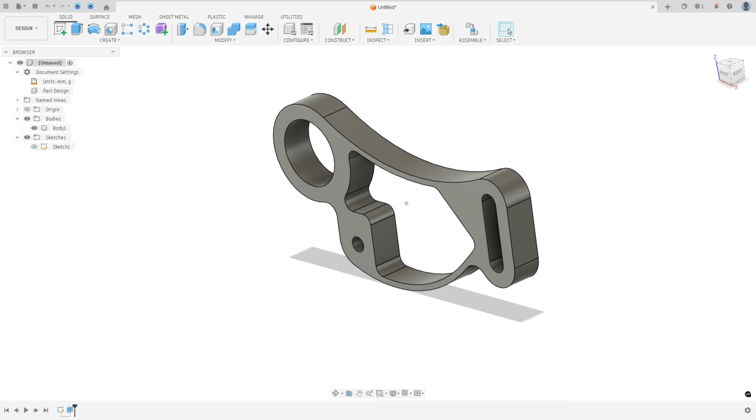Let's try one more challenge in Autodesk Fusion. In this challenge, we need to create this body using only one sketch.

So open Fusion and let's go. Let's make this challenge step by step.

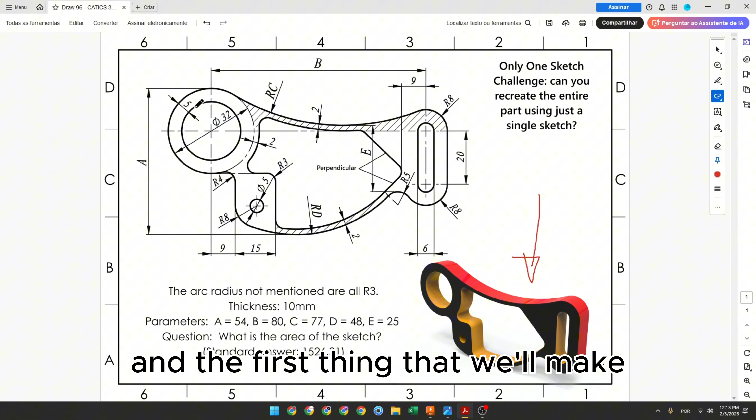The first thing we'll make is this circle here with 32 millimeters of diameter, and create this circle concentric with this one, with the distance between the two circles being 5 millimeters.

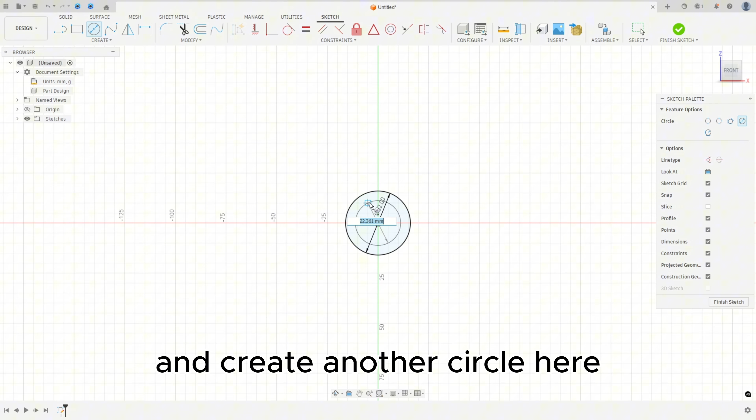Go to create a sketch, select the front plane, select the circle of 32 millimeters and create another circle here. Go to sketch dimension. The distance here is 5 millimeters.

Now we will create this slot. This slot is 20 by 6 millimeters, and the distance between this point here and this point here is letter B, 80 millimeters. And this point here is vertical with this point.

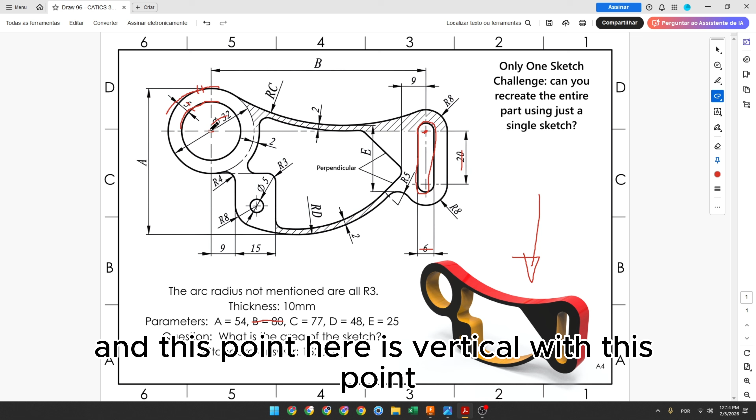Go to create, select slot, center to center slot, click here on this point, 20 millimeters here, and 6 millimeters of diameter.

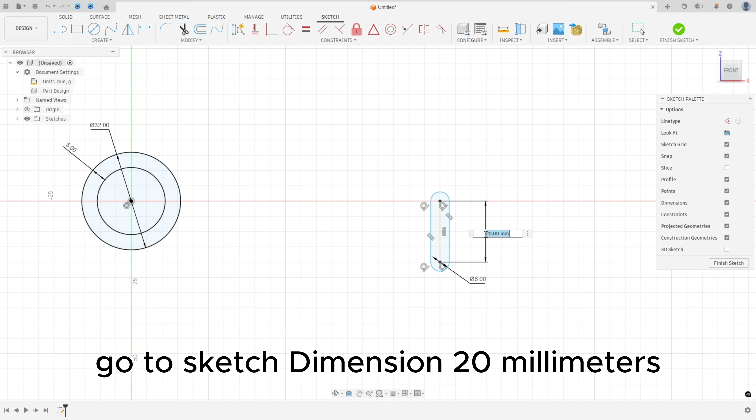Go to sketch dimension, 20 millimeters, and go to constraint, select horizontal vertical, select this point and this point here. And the distance between these two points is letter B, 80 millimeters.

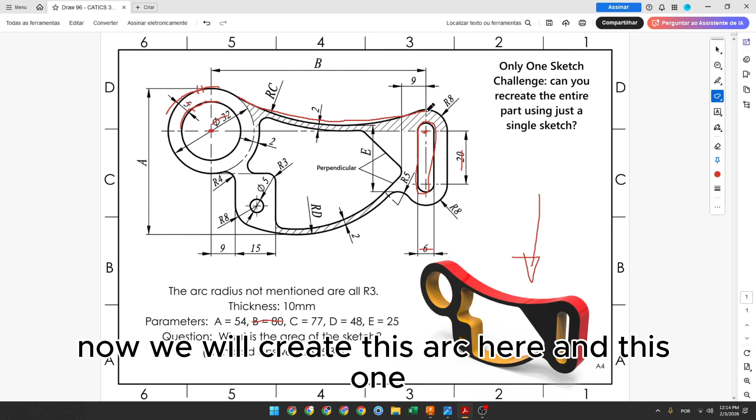Now we will create this arc here and this one. This arc has 77 millimeters of radius, and it is tangent with this circle and tangent with this arc.

And this arc here has 8 millimeters of radius, and it is concentric with this arc here.

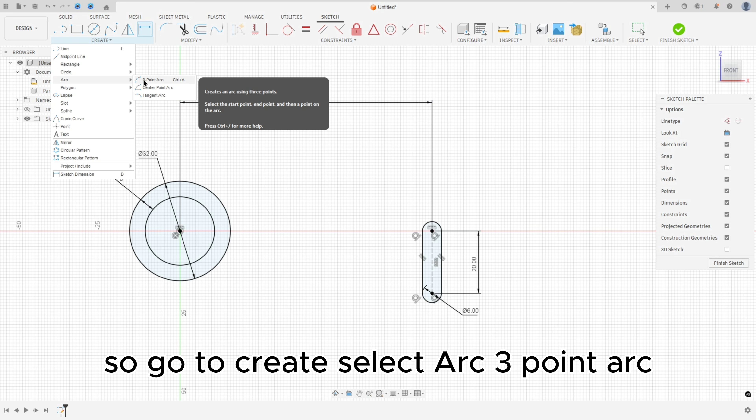So go to create, select the arc, 3-point arc, click here in the circle, make an arc here, and create another arc here. Make this arc tangent, and make this one tangent with this circle.

Go to constraint, select concentric, select this arc and this one. And select horizontal vertical, select this point and this point here.

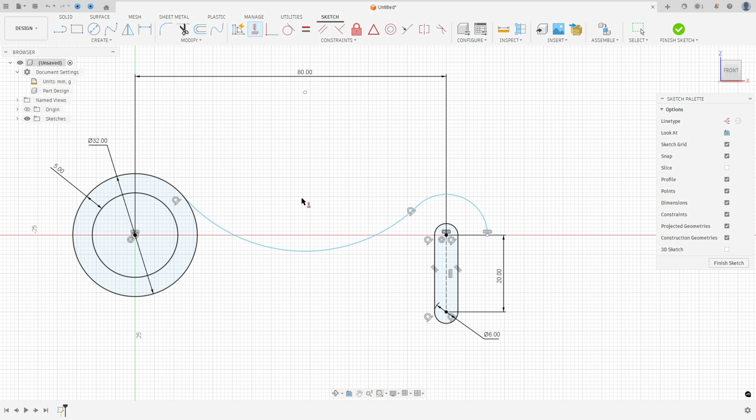Go to sketch dimension. The radius here is 77, and the radius here is 8 millimeters. Let me move this dimension a little bit.

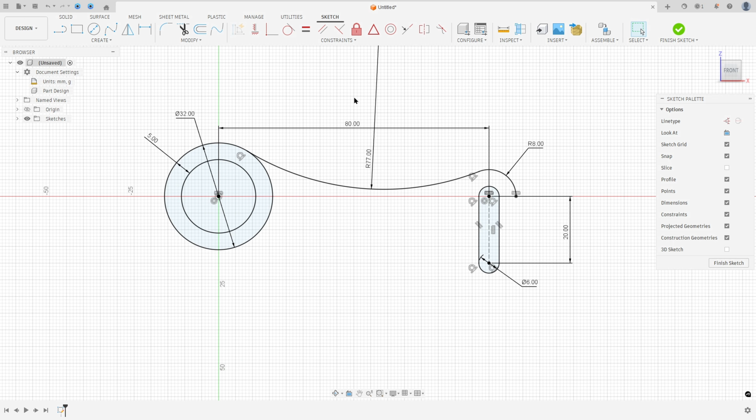Now we will create a line here with 20 millimeters and create another arc here with 8 millimeters of radius.

So select line, click here in this point, make a line here. Click here and hold the left button of the mouse to create another arc.

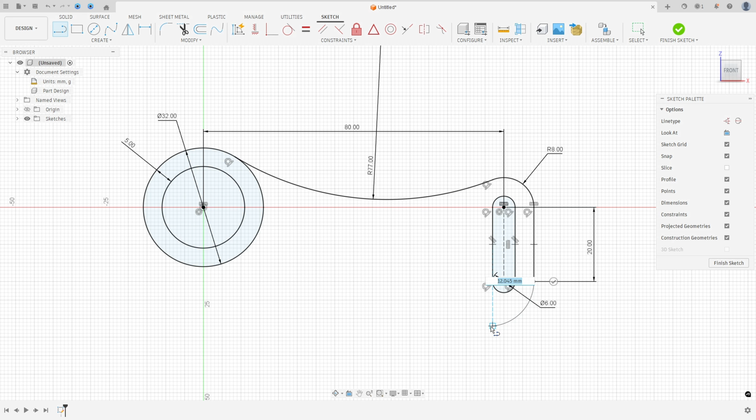Go to constraint, select horizontal vertical, select this point and this point here. And the radius here is 8 millimeters.

Or you can just make this concentric here. Move this point here a little bit.

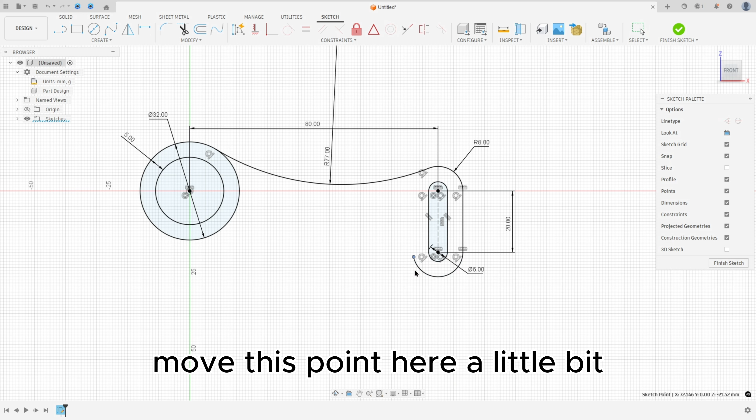And here we have an arc with 5 millimeters of radius. So go to arc, 3-point arc, make an arc here, and make this tangent with this arc here. And the radius here is 5 millimeters.

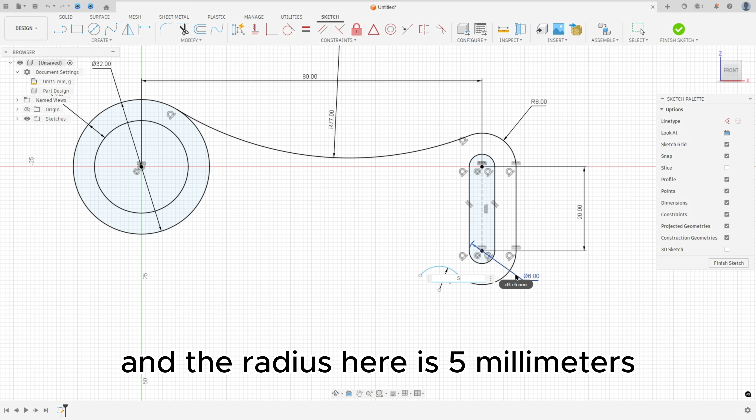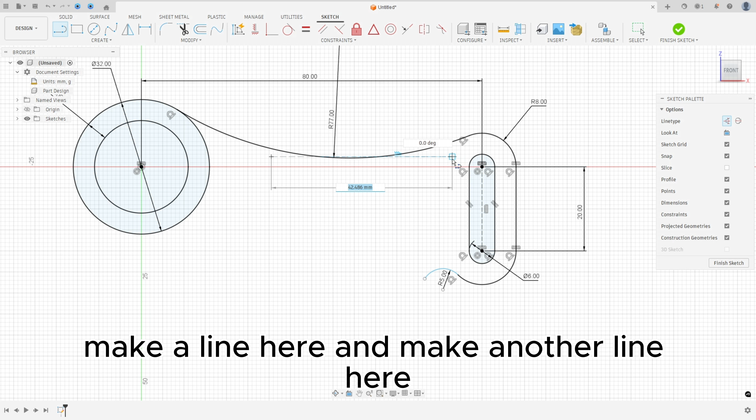So to create this, select line, construction line, make a line here, and make another line here. Go to constraint, select tangent, select this line and this arc, select this line and this arc.

And the distance between these two lines is 25 millimeters.

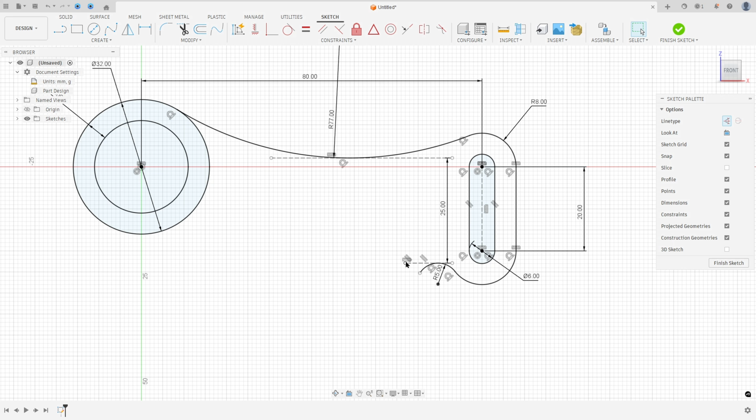You can move this line a little bit here, or move this dimension. I made 2 lines here, sorry. I will move this just to make the sketch better to see, okay?

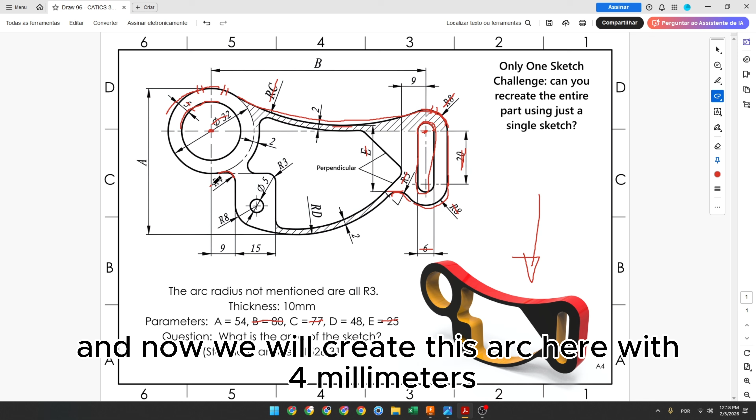And now we will create this arc here with 4 millimeters, and this arc is tangent with this circle, and we will create this line here. The distance between this line and the center point is 9 millimeters.

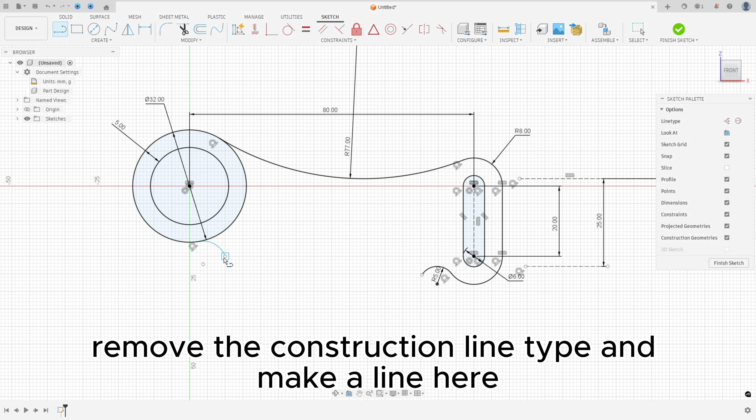So go to arc, 3-point arc, click here in the circle, make an arc here, remove the construction line type, and make a line here. Make sure that this arc is tangent with this line and tangent with this circle.

Go to sketch dimension. The radius here is 4, and the distance between this line and the midpoint here is 9 millimeters.

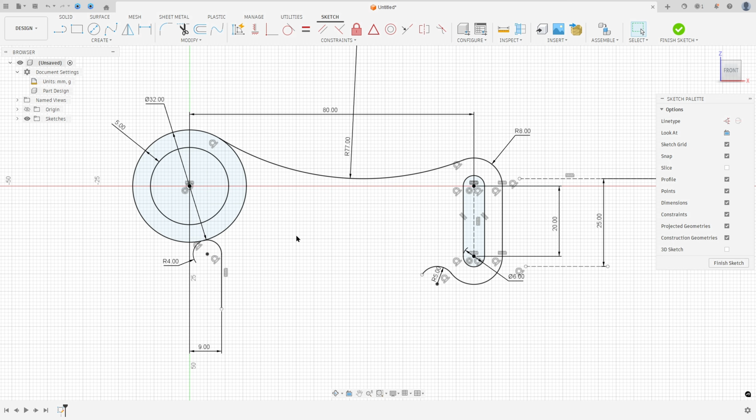And now we will create this arc with 8 millimeters of radius, and this arc here with 48 millimeters of radius. So go to create, select the arc, 3-point arc, make an arc here, and create another arc here.

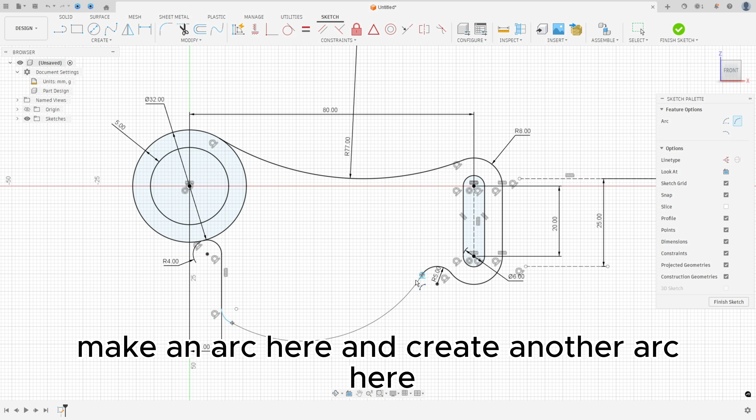This arc is tangent on both sides. Let's delete this a little bit. Make this tangent here.

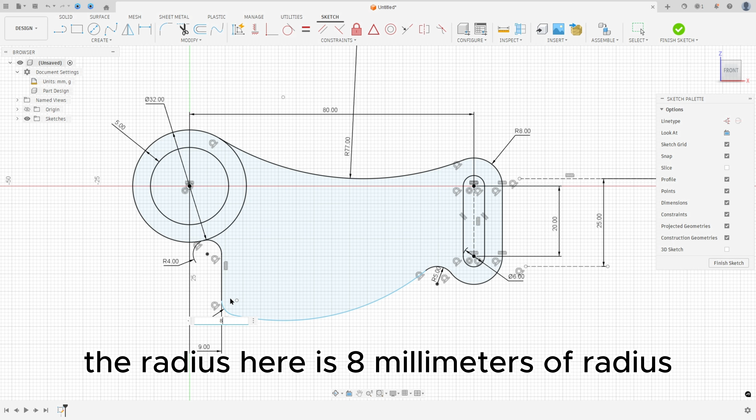Go to sketch dimension. The radius here is 8 millimeters, and the radius here is 48.

And the distance between the tangent point of this arc and this point here is letter A, 54 millimeters.

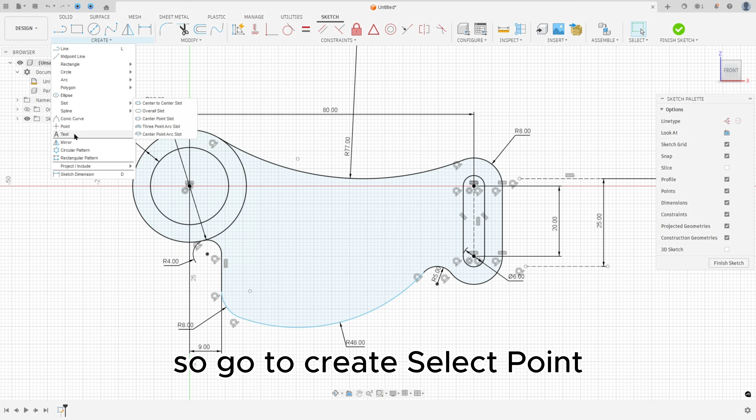So go to create, select the point, make a point here, and go to constraint, select horizontal, vertical, select this point and this point here. Then select line, construction line, make a construction line here, and make this construction line tangent with this arc.

Go to sketch dimension, select this line and this point here. The distance here is 54 millimeters.

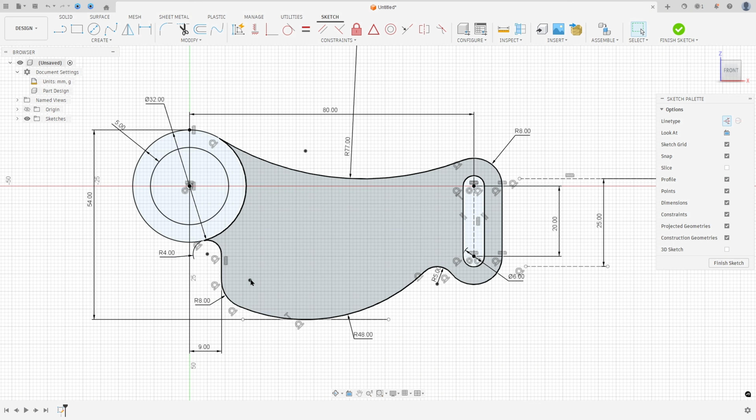We made this one. Now go to modify and select break. Select this arc here. And click here, make this construction line type.

And now we will create this arc. This arc is concentric with this circle. And the distance between this arc and this arc here is 2 millimeters.

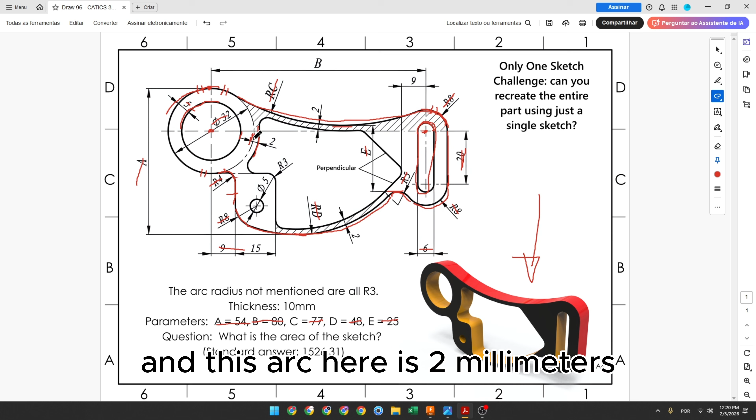So go to create, select the arc, center point arc, click here in this point. Remove the construction line type. Make an arc here. And go to sketch dimension. The distance here is 2 millimeters.

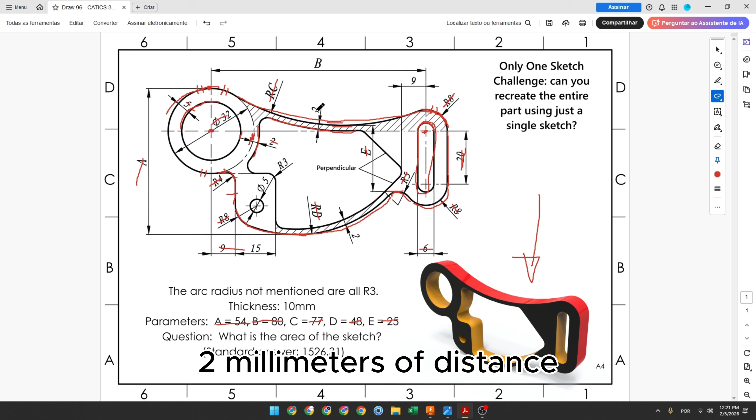And now we'll make an offset of this arc here, 2 millimeters of distance. So go to offset, select it, remove the chain selection here, select only this arc, move here 2 millimeters, press OK.

And go to constraint, select coincident, select this point and this point here.

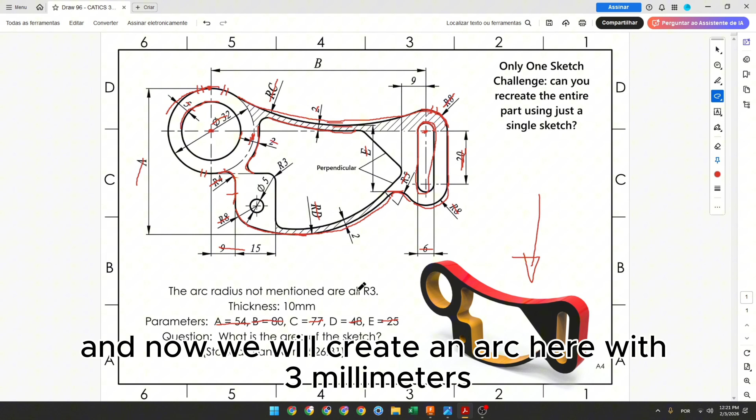Now we will create an arc here with 3 millimeters. All this fillet, or these arcs, and this edge is 3 millimeters, okay? So we will create an arc here and a line here.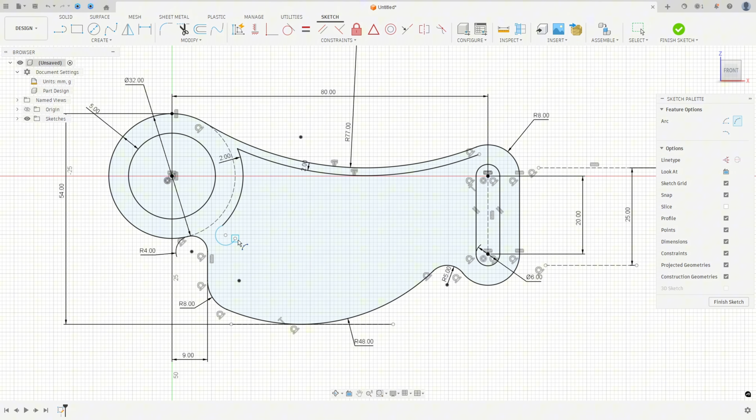Select the arc, 3-point arc, make an arc here. Move this a little bit and make a line here. Go to constraint, select tangent, select this arc and this one, this arc and this line. Go to constraint, select horizontal, vertical, select this point here.

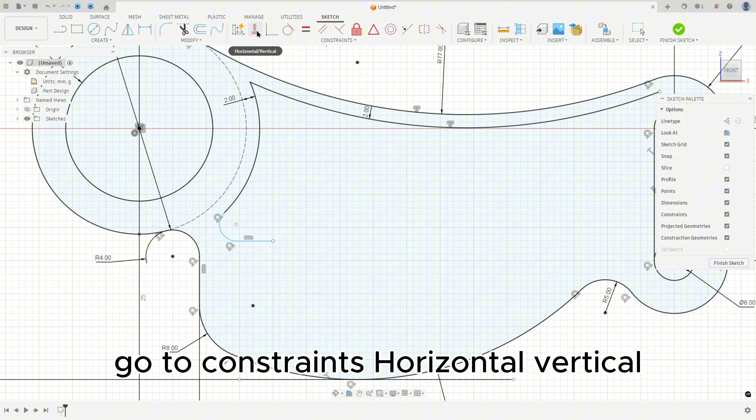Let's create a point here. Go to constraint, horizontal, vertical. Select horizontal, vertical again. Select this line here, select this point and this point here.

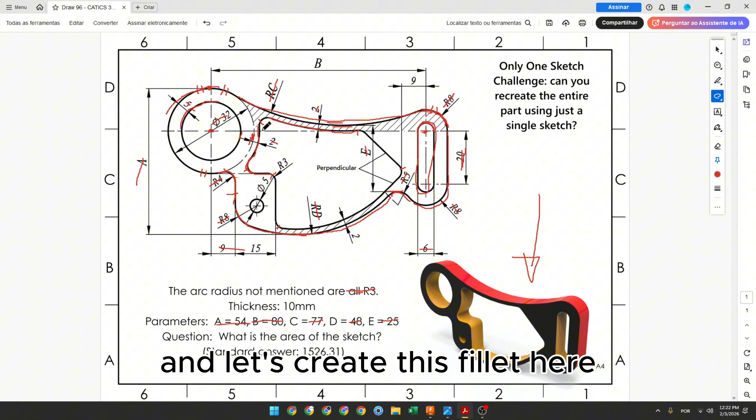Go to sketch dimension. The radius here is 3 millimeters. And let's create this fillet here, 3 millimeters.

Go to fillet, select this arc and this one, 3 millimeters, press OK. He lost the reference here, so go select this arc and this one. The distance here is 2 millimeters.

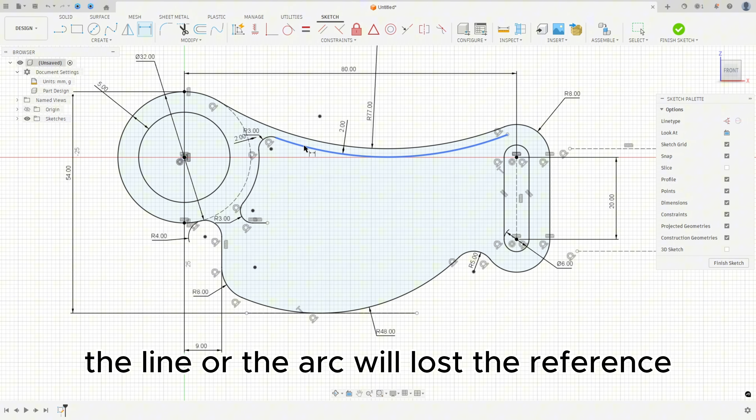Sometimes when you use a fillet, the line or the arc will lose the reference, so you need to make this again, okay? Now we will create this fillet here with 3 millimeters and this line, and the distance between this line here and the midpoint and this line here, sorry, is 15 millimeters.

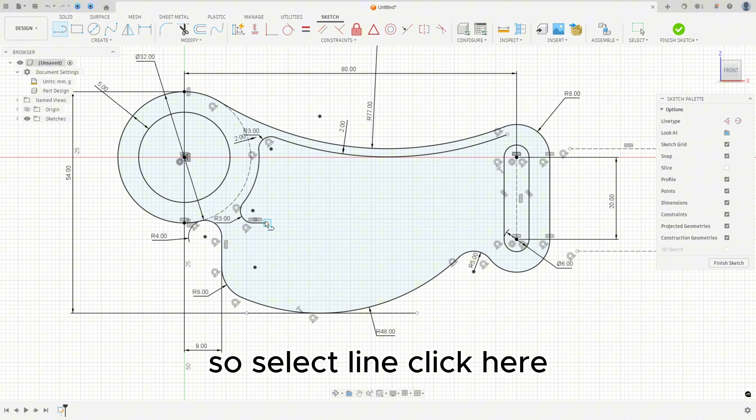Select a line, click here and hold the left button of the mouse to create an arc and make a line here. Make this tangent on both sides and make this line a vertical line. The radius here is 3 millimeters and the distance between this line here and this line here is 15 millimeters.

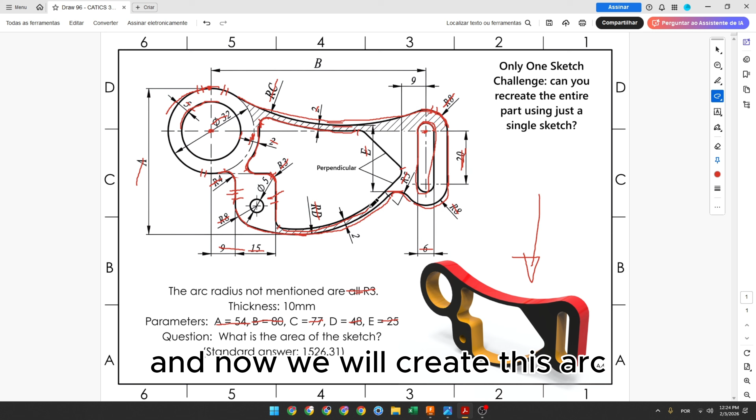Now we will create this arc, and the distance between this arc and this one is 2 millimeters, so we'll create an offset, and here we'll have a fillet with 3 millimeters. Go to offset, select this arc here, minus 2 millimeters, and press OK.

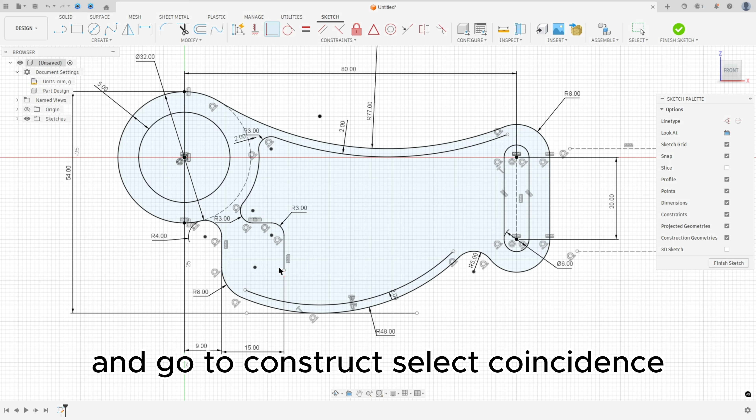Go to constraint, select coincident, select this point and this point here. Now go to fillet, select this arc and this one, the fillet here is 3 millimeters, press OK. Look that he lost the reference, so go to sketch dimension, the distance here, 2 millimeters.

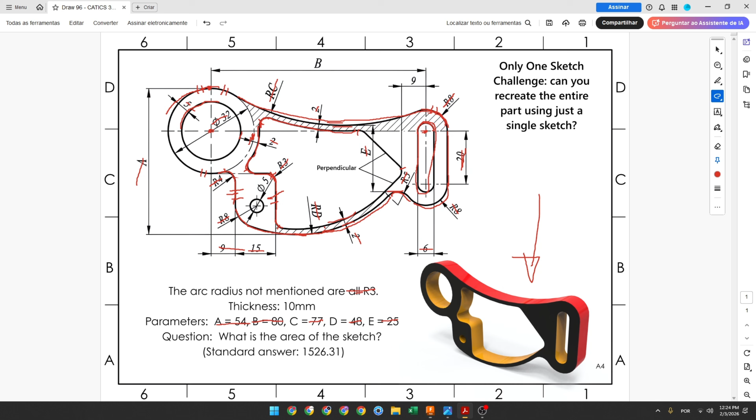Here let's create the circle. It is concentric with this arc and the diameter is 5 millimeters. Select the circle, click here on this point, 5 millimeters, and press OK.

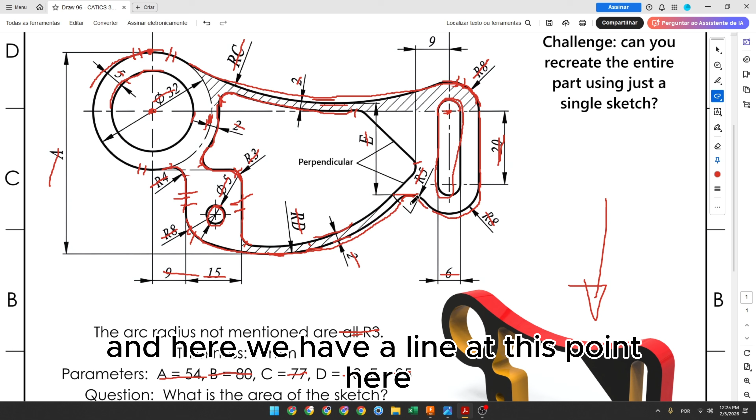And here we have a line at this point here. Let me remove some. We have a line here, this arc and this line. This line is tangent with this arc.

And here we have a fillet with 3 millimeters and another line here. This line and this one is perpendicular.

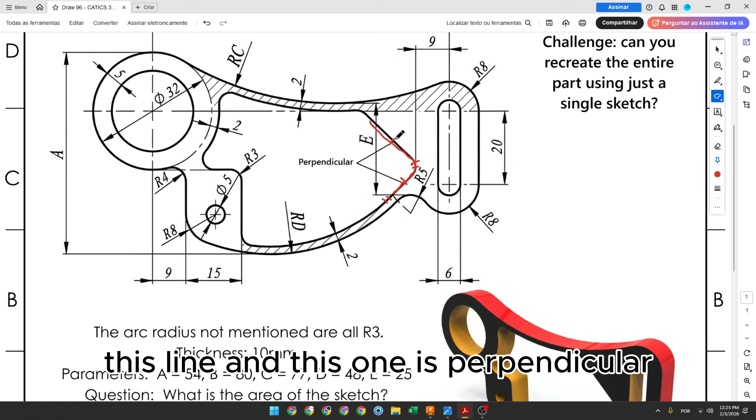Let's move this a little bit here, select the line, click here on this point, make a line here, make an arc, and make another line.

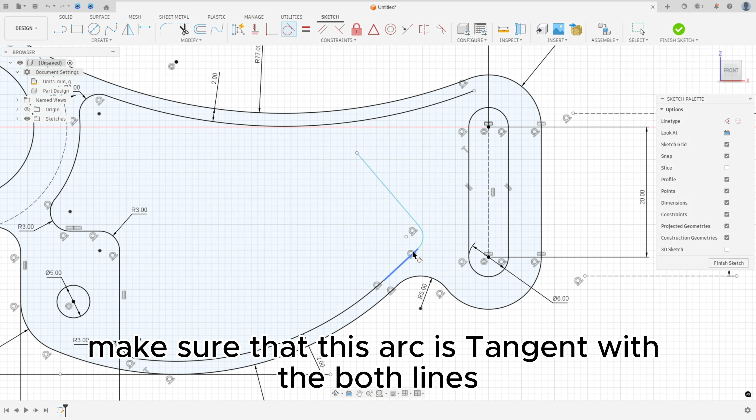Go to constraint, select tangent, select this arc and this line here, make sure that this arc is tangent with both lines, and make sure that this line here is tangent with this arc.

Select a line, a construction line type. We needed to create a line here. It is perpendicular with this line. And this point here is where this arc meets this arc here.

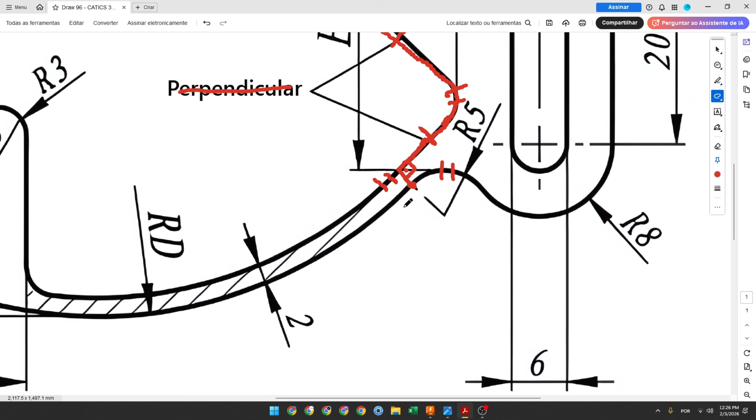Select a line, a construction line, click here in this point, make a line here. And here go to constraints and select perpendicular, select this line and this one.

Go to sketch dimension. This arc here has 3 millimeters. Go to constraints, perpendicular, select this line and this one. Now go to coincident, select this point here and this point here.

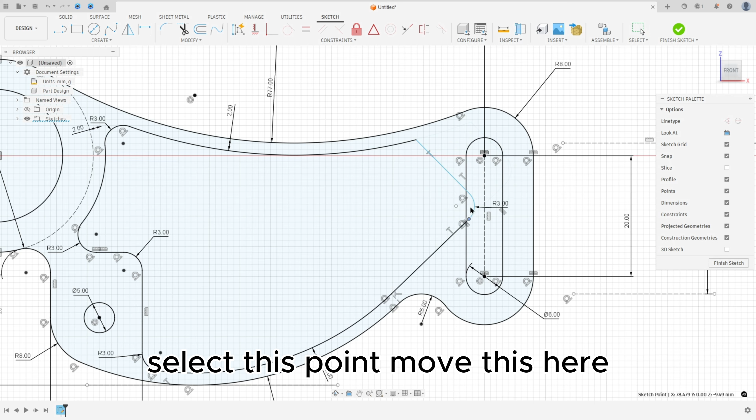And we can move this a little bit. Select this point, move this here. And the distance between this arc here, the tangent point of this arc and this line here, is 9 millimeters.

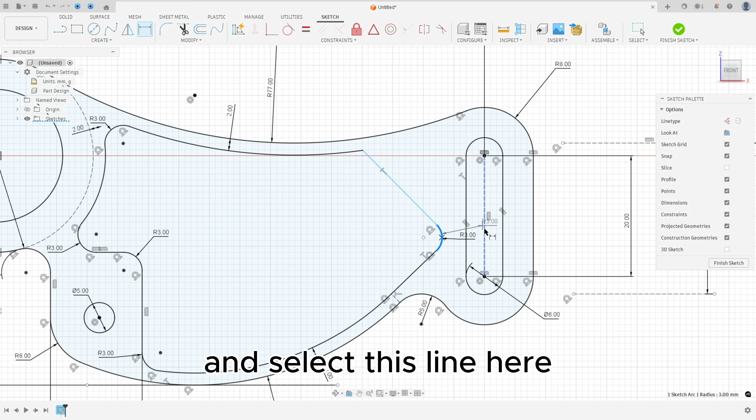Go to sketch dimension, click with the right button and select this arc here and select this line here. The distance is 9 millimeters. When you click with the right button, you need to select pick circle arc tangent to take the tangent point of this arc. Okay. And here we have a fillet with 3 millimeters.

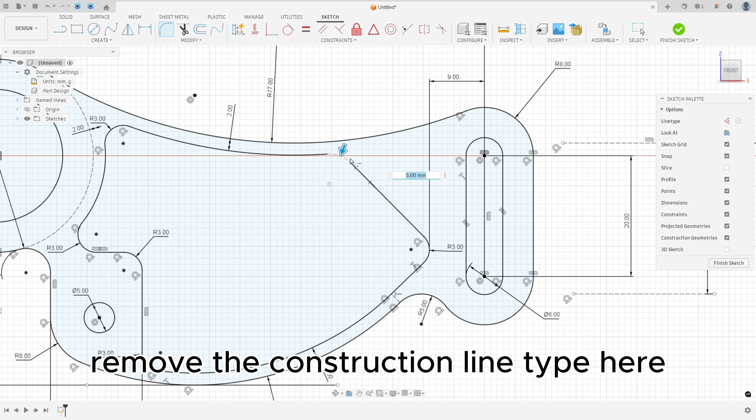Remove the construction line type here. 5 millimeters.

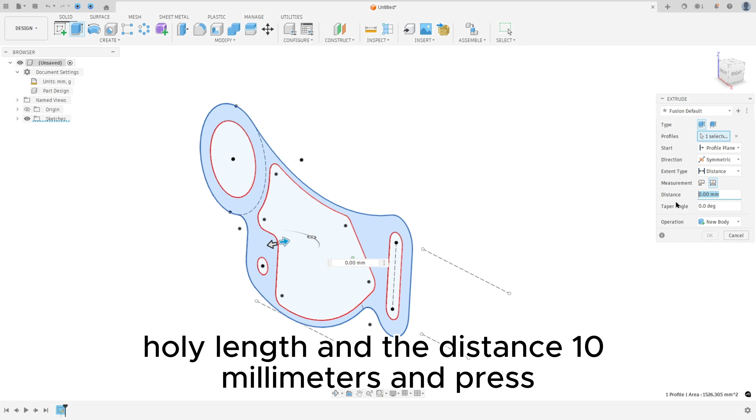We made this. Now we will extrude this 10 millimeters. Go to finish sketch, go to extrude, select this profile, direction symmetric, measurement whole length, and the distance 10 millimeters. And press OK.

We made this. Now the question, what is the area of this sketch? Here is the answer, so let's check this. Go to inspect and select measure and select this face here.

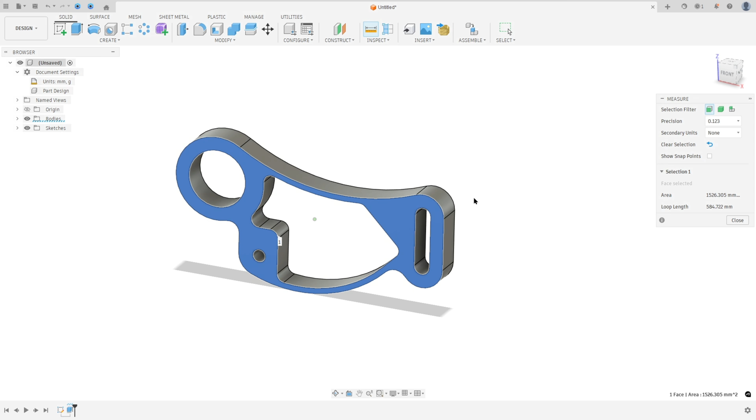And let me move the answer here. It is the same answer. So here we finish our exercise.